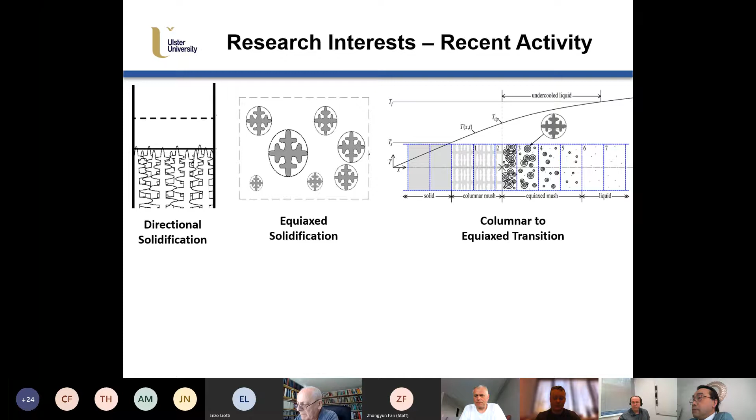I have an interest in equiaxed solidification, grain refinement and so forth, which I'll talk about in more detail today. Then the columnar to equiaxed transition, a very natural but non-trivial extension of the previous 2 domains. Recently, we have interests in additive manufacturing, modeling a moving point heat source, with research associate Dr. Sagar Nikam and PhD candidate Miss Anna Harley.

Also recently, liquid phase separation that happens in monotectic alloys, looking at what happens in the liquid as it separates out. Dr. Emma Kerr and Miss Courtney Gallagher, a PhD candidate, work in this area, in collaboration with Access eV in Germany.

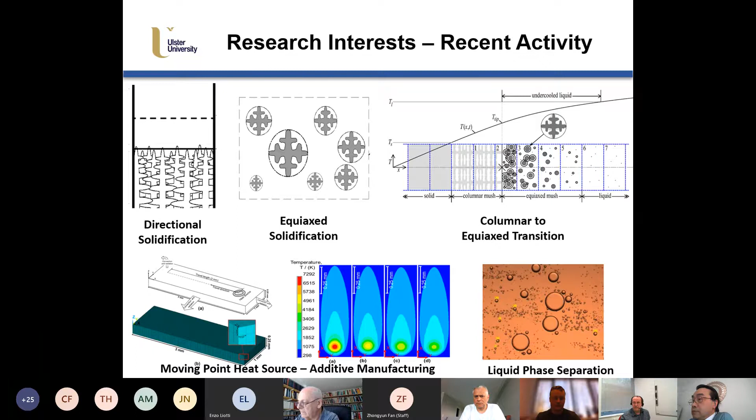Going into directional solidification, this is work in collaboration with Professor Anthony Robinson, a heat transfer specialist at Trinity College Dublin, and Mr. Turlough Hughes, a PhD candidate we co-supervise. This is a neopentyl glycol alloy, alloyed with camphor, 35% weight camphor. It's transparent, but it also undergoes dendrite orientation transitions. It's face-centered cubic, but changes morphology based on composition: at low compositions it's a classic 100, and above 30% it starts to exhibit 111 growth behavior. Turlough is on the line today.

I'm going to show you some of his work. You should see the apparatus here. We do solidification from the bottom up, and behind the dendrite tips it's quite translucent and very difficult to pick up detail. But at the dendrite tip itself, you can see some detail. With a very robust and novel algorithm, you're able to determine both the growth velocity and the orientation of the dendrite tips. There's a thermocouple within the sample, and it gives a reasonable estimate of the temperature at the tips as it reaches them. The best analogy is that we're no longer identifying select dendrites as representative of the growth, but analyzing the entire forest of dendrites.

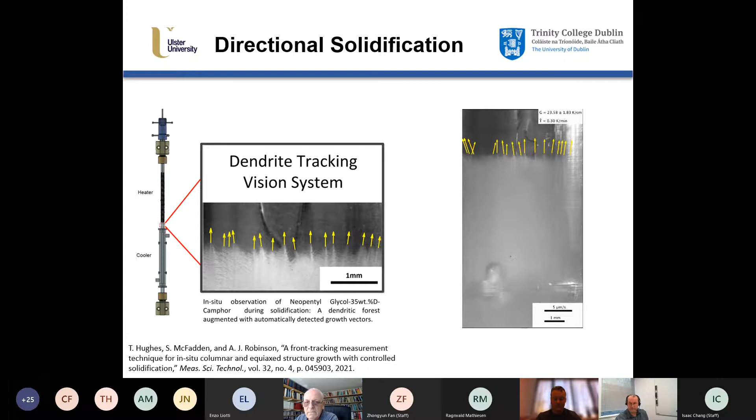And also looking at another automatic system that tracks the front, but then it crops a window around the front position, and then it concatenates the figures and builds up this true representation of the growth. And what you can see is a lot more detail. So you can see the orientation, the colonies of the grains, the grain boundaries, and you can see primary and secondary dendrite arms.

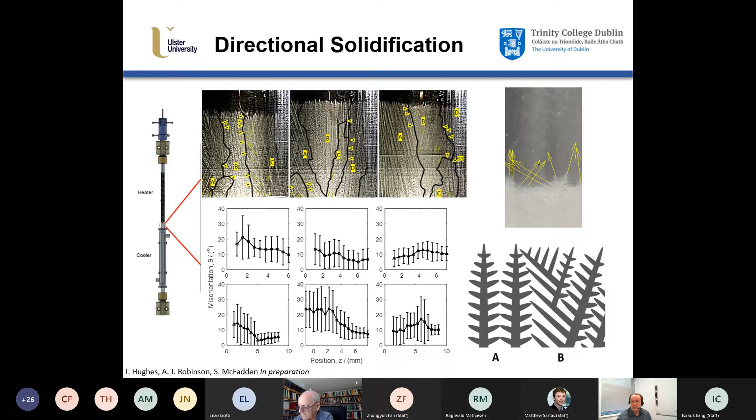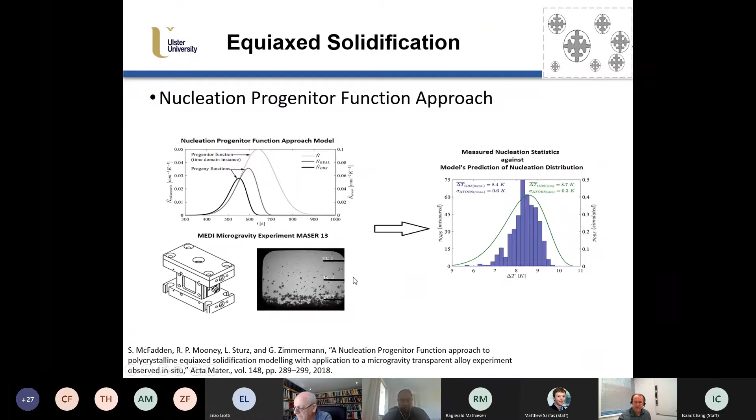Moving on then to equiaxed solidification. We've developed this method called the Nucleation Progenitor Function approach. And I just say that this was published in 2018. And we based this on the MEDI experiment. And I'm going to go into much more detail in this, so I'm just going to move quickly on from this one.

Moving on to columnar to equiaxed transitions. So there's a series of experiments done throughout the CETSOL project. Experimental data was gathered from the International Space Station, where they did Bridgman type solidification. And under different kinds of transient conditions, they were able to get different types of CET. And with a velocity jump, you get a very sharp CET. So you see this columnar solidification and then transitioning very abruptly into equiaxed.

And then when you do gradient decrease, you see that it is best described as being majority columnar to begin with, and then majority equiaxed at the end. And even at the end, you'll see very clear evidence of elongated columnar grains within the structure. They become less prominent at the end, but this is what we call a progressive CET. So it's not a sharp CET.

So how to capture this? Well, we used the Nucleation Progenitor Function approach for equiaxed, and we used front tracking for the columnar. And we did a fairly fundamental thing. We said, well, why don't we just completely disband with any mechanical blocking criterion? There's a very famous mechanical blocking criterion by Professor Hunt, and we said we would just try and model this using Kolmogorov principles, which were the principles of the Avrami equation.

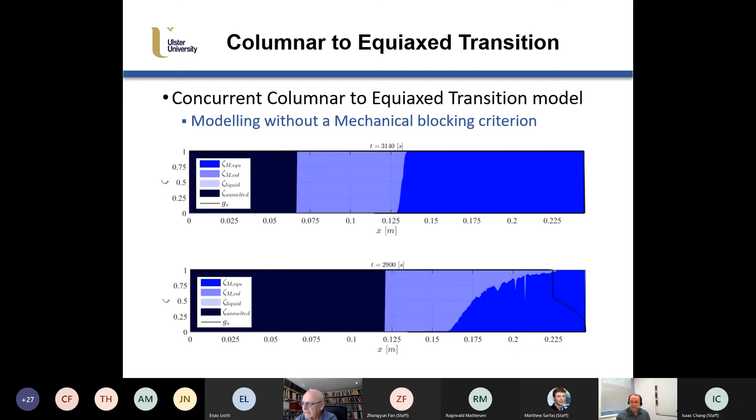And you see the solid fraction in the black line. But then in the case beneath, you see a very progressive transition from the equiaxed as it overtakes the columnar solidification. So this is kind of the behavior qualitatively that we were looking for in the modeling.

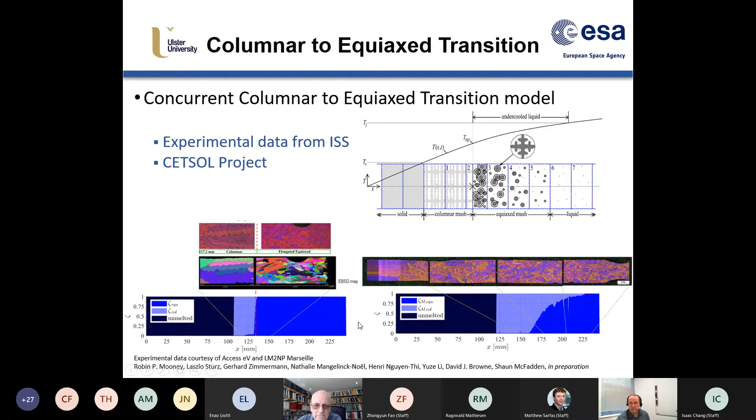And then when we compared that, and if you look at the extents and try to map against the different positions, I think the agreement is reasonably good. There were 4 experiments done in total, and we were able to then take the information from the simulation. So this is the information, the tip growth rate and the temperature gradient at the solidification front, and able to map this onto a Hunt diagram.

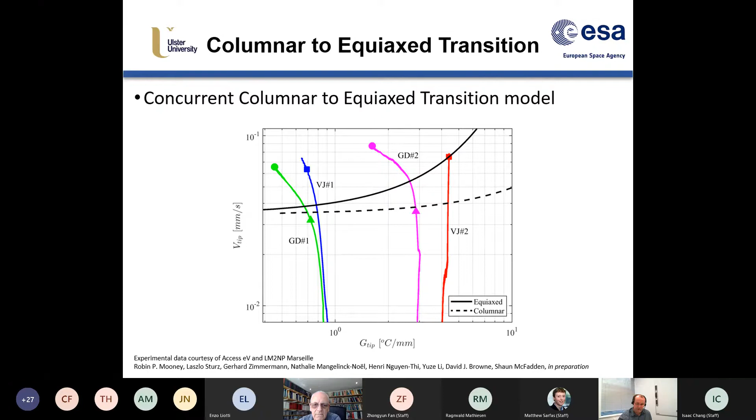And what we found was that it was very hard to get a single set of nucleation parameters for the Hunt diagram that would satisfy all 4 cases. It was practically very difficult, I would say impossible to do. What we were able to do, though, with the simulations, all 4 cases, we were able to simulate faithfully the CET transitions in all 4 using a consistent set of parameters, using the combined concurrent columnar to equiaxed transition model.

Very briefly then, moving point heat sources. So modeling in ANSYS and Fluent, we are looking at what's the effect of Marangoni convection on the moving point heat source. So there's a temperature gradient across the top of the surface of the melt pool in additive manufacturing, and then this causes a surface tension gradient, and that sets up a Marangoni convection. The effect of that Marangoni convection is to reduce the overall peak temperature. It sort of broadens out the melt pool and it makes it more shallow.

So a simplified way of doing that is to artificially increase the thermal conductivity in the liquid if you're modeling with conduction only. That will have the same effects. And so that's done quite a lot in literature, but there's not really much agreement as to what correction factor you should use. So what we did here was we modeled in Fluent with Marangoni convection, and then we modeled in ANSYS using APDL with the conduction code.

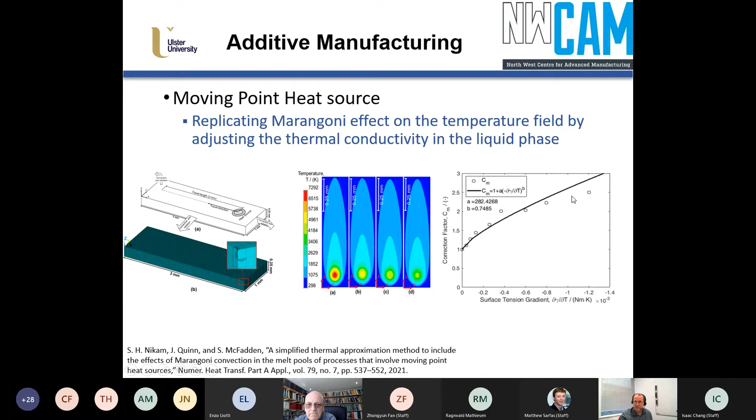And we modified the surface tension gradient in this Fluent model, and we modified the correction factor for thermal conductivity in liquid in the APDL conduction model. And we got this relationship, so that's out there now for people to use if they find it useful. Okay, so back to our outline.

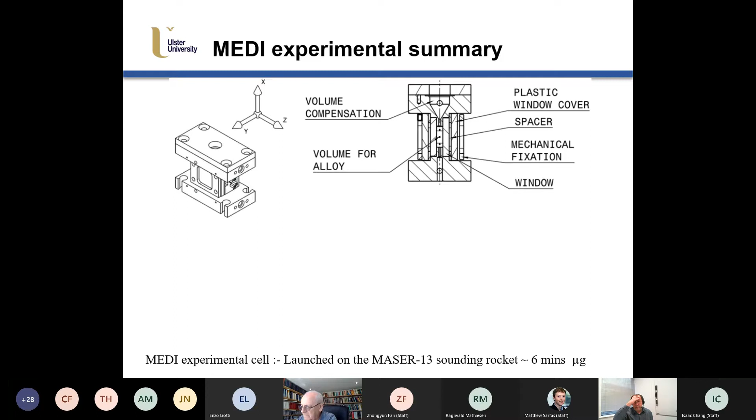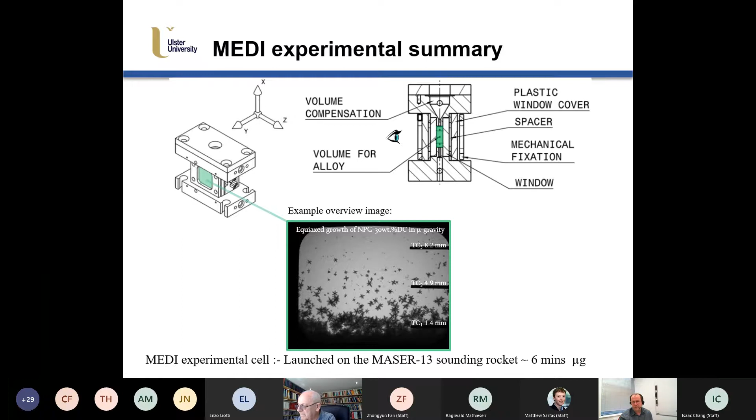So a very important point to move on here is to express this nucleation progenitor function approach. So the MEDI experiment was flown on the Maser 13 sounding rocket, and it achieved around 6 minutes of microgravity. So within this assembly, you have a little pocket here of the sample, and it's heated top and bottom. It has 3 thermocouples inside, and you were able to observe this window, and it's backlit, so you can see through all of the equiaxed crystals. One of the nice things about neopentyl glycol-d-camphor alloy is that it's quite a good equiaxed former. And so at low temperature gradients, it was able to form equiaxed.

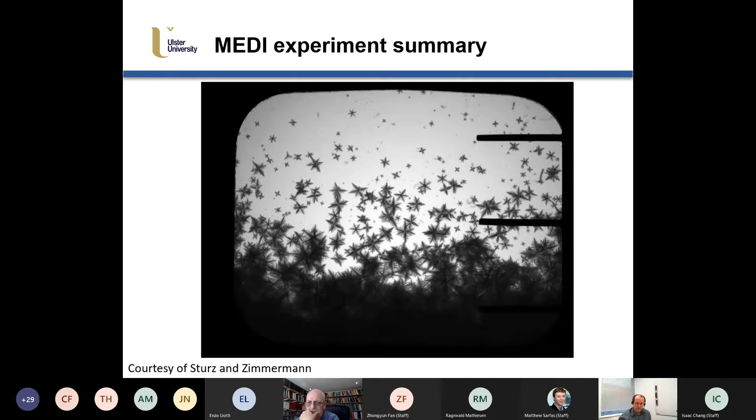And hopefully you can see a video of the microgravity video data that was obtained. And you see there's a slight temperature gradient, so it's slightly cooler at the bottom and slightly hotter at the top. And then you see the solidification coming up. And that was as much as they were able to do in microgravity. But it's a lot, and there's some good information there.

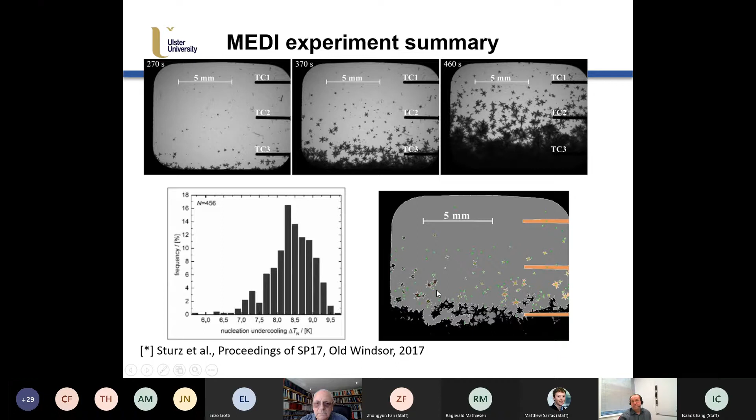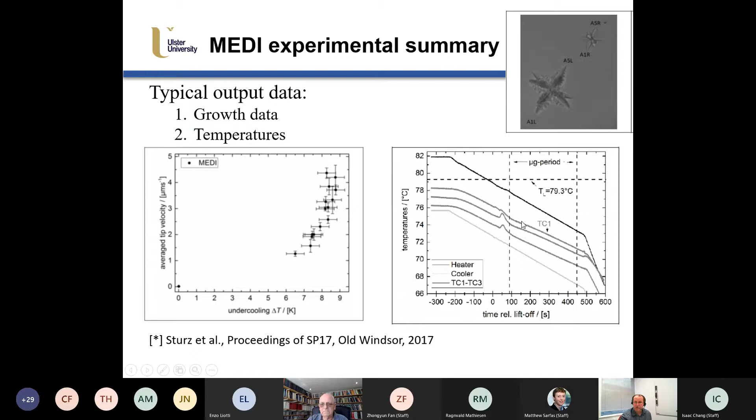They were able to get the frequency of the nucleation events. They were also able to do some thresholding here of the images to get the area fraction. And so all of this data was out there. They also had a nice optics system where they were able to zoom in and magnify individual crystals, and they were able to get some average tip velocity versus undercooling. So again, growing at around 6 to 8 Kelvin of undercooling. And because the thermocouples were inserted within the sample, they also have pretty good temperature data inside as well.

So one of the issues that we came across with this experiment, the sample itself is around 3 millimeters thick in depth. So the crystals are much smaller than 3 millimeters. So that causes what we call a stereology problem. So it was backlit, and it's observed from the front. And this is a solid model that I developed here, and you can see that individually, none of these particles are impinging with each other. They're all isolated, separate, individual particles.

But when you project them onto the front, you get this problem of overprojection. So some of them seem to be overlapping, but they're not. And some of them will be unobservable because they're either obstructed from view or in the shadow of a bigger crystal. So you don't really get a true representation on the plane. You get an areal representation of what happens in 3D.

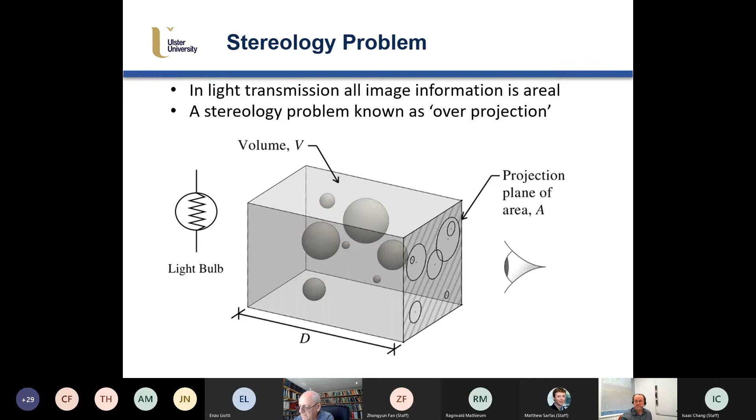So trying to get to the bottom of this and trying to tackle this problem, we returned back to the Kolmogorov definitions of the Avrami equation, one of the most famous equations in transformation kinetics. If you go back to Kolmogorov, he was a statistician, and he did a lot of statistical analysis and introduced this concept of real and phantom nucleation.

And so we revisited, and what we looked at is you have this nucleation activation rate, first of all. So all of your seed particles are passive, and then they become active. So this would be like initiation, let's say. But how many of these are actually real, and how many are, to quote a phrase, phantom? So what does phantom mean?

Phantom means how many of these, if they had nucleated, would have nucleated in a previously transformed region. So they never nucleated. But from a mathematical perspective, Kolmogorov insisted that you should really model the phantom nucleation as well, and then you can develop a much more consistent mathematical model. So you have real nucleation. These are the ones that we're trying to capture that really nucleate in 3D.

But extending that principle again to 2D, we can look at Kolmogorov principles here. So we can get the real nucleation events, and we can calculate how many of those are observable based on area fraction and volume fraction and the depth of the sample. Or we could just go directly from the activation rate and calculate the number of observations based on this. So it gives you the same results, whichever way you do it. That's the one feature.

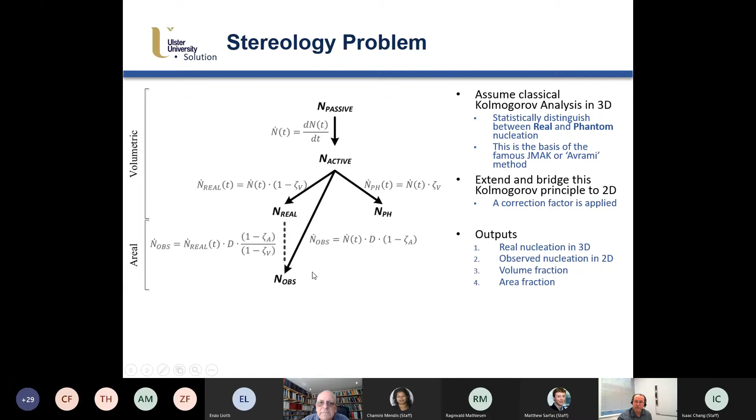Okay, so let's go. And so the idea here is that there is a way of calculating the number observed in the 2D plane. And so the outputs here are real nucleation in 3D and observed nucleation in 2D. You get volume fraction and area fraction. And with all of this information, you can construct the complete picture.

So we compared this then to some of the classical stereology. Underwood had some correction factors, and if you break it down, you can show that they're equivalent. It is equivalent.

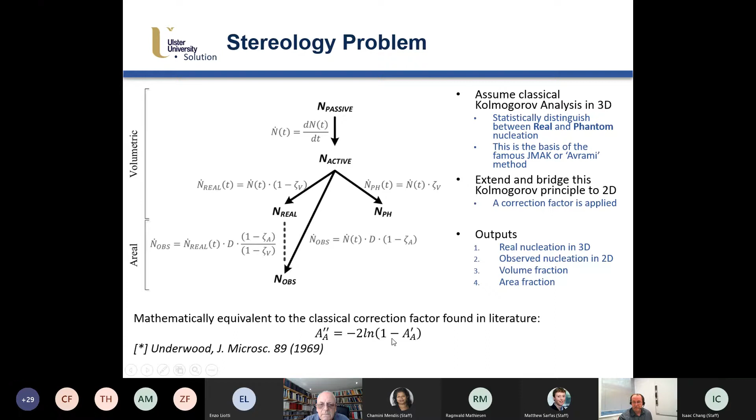So what is the nucleation progenitor function approach? It's new terminology that we've introduced, and what we're trying to do is look at it in a different way that will be more instructive. And in particular, we're aiming to define progenitor-progeny relationships within the theory of microstructural kinetics.

What's a progenitor? A progenitor is a function that describes where all seeds come from, or how all seeds are arranged in the domain. They're assumed to be distributed uniformly following a Poisson distribution, and then you can have any athermal distribution in undercooling. Here we show the one by Oldfield from 1966, which is a normal distribution. You can have a log normal distribution, and that might be closer to the work of Professor Greer and co-workers.

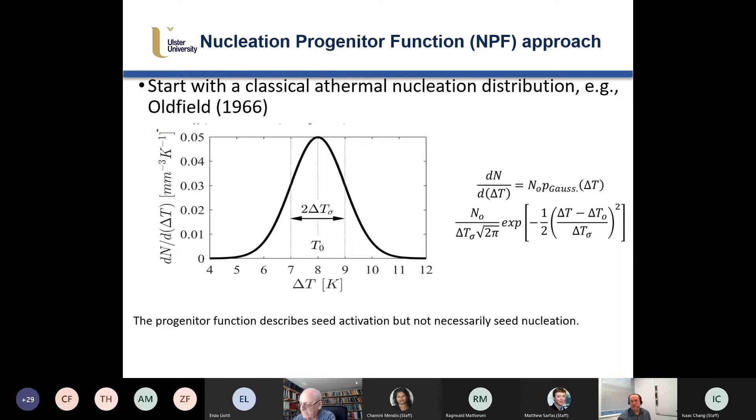You could have exponential. You could have a Dirac function, and that would be able to model explosive nucleation. But all of these are like plug and play. So you need a description of athermal nucleation, and we call this the progenitor function. The progenitor function describes seed activation, but not necessarily seed nucleation, or initiation, as we may call it.

So one of the benefits we found of looking at this NPF approach and the Kolmogorov methods is that there's a host of statistical tools available that give really good information if you look at it in this way. So the first thing we do is apply a coordinate transformation. If you have the time temperature curves, you can go from undercooling to a time-based coordinate transformation. That's very easy to do.

You can do that either through modeling, or I suppose you could do it experimentally as well if you had the cooling curves. But then we apply exactly the approach that I've just described to you. And we look at this here as the progenitor. And then down below, these sort of children are the progeny of the progenitor.

So here's the progenitor that applies across all. It's a full description of the nucleation characteristic, and the progeny functions that come out of this then are shown here, and they're all derived off the progenitor. So here you have a real progeny. The real progeny is what really nucleates, and the difference between the progeny and the progenitor is phantom nucleation. You also have a progeny for the 2D observation on the 2D plane, and because it's separate units, we have it here on the right hand side, so it looks slightly different, but this is also derived from the progenitor.

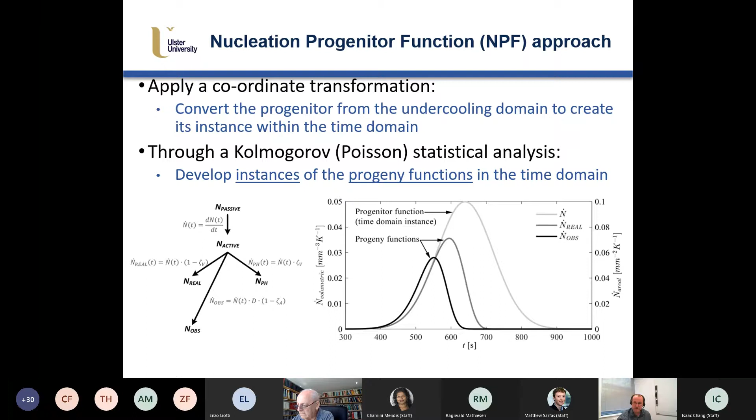There's one progenitor that applies across the entire domain as a description of the grain refiner. But every single nodal point in this simulation and in the domain will have its own progeny that develops over time. So there's a lot of information available from all of these progeny that all come from one progenitor. And what you're able to do then is obviously you can integrate to get nucleation density, nucleation counts. And you can also then compare the activation rate to the real rate, and you can get the nucleation efficiency.

Continuing on with these statistical tools, you can reverse the coordinate transformation at any point. So you can go back into the undercooling domain, and you can normalize, which is another statistical process, and you can apply the expected value theorem. And through the application of this, you are able to determine mean undercooling, the standard deviation of the undercooling, the real undercooling. And indeed, if you wanted to, you could go higher order statistics. You could also calculate skewness, kurtosis, up to that level.

So what are the advantages of NPF? So if we're doing anything, we want to add value to it. So why are we doing it this way? We're doing it this way because of these particular advantages. We can easily include the stereology correction. That was the initial motivation for doing it. But what we found was through this normalization process and using application of expected value theorems, at any point you're able to develop formative outputs or running statistics or summative outputs at the end of the simulation.

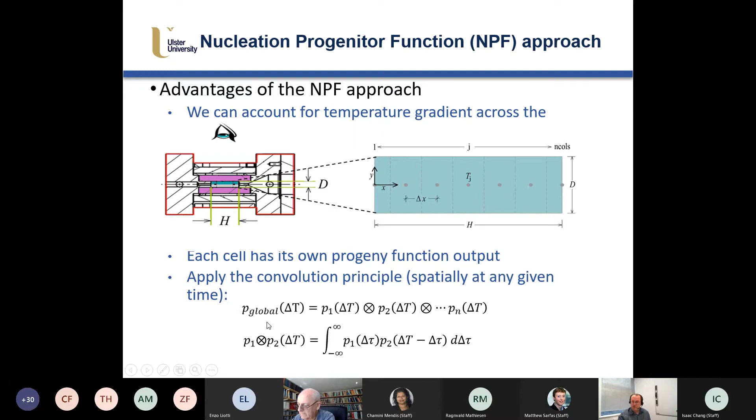As I explained, there are progeny functions at every nodal point. So how do you summate all of these? Well, if you use the principle of convolution, you can add all of these progeny together, and then you get an entire global representation of the nucleation across the entire domain, or any domain of interest, really. So we did here the entire domain, and we're able to get a global output for nucleation across the entire undercooling domain.

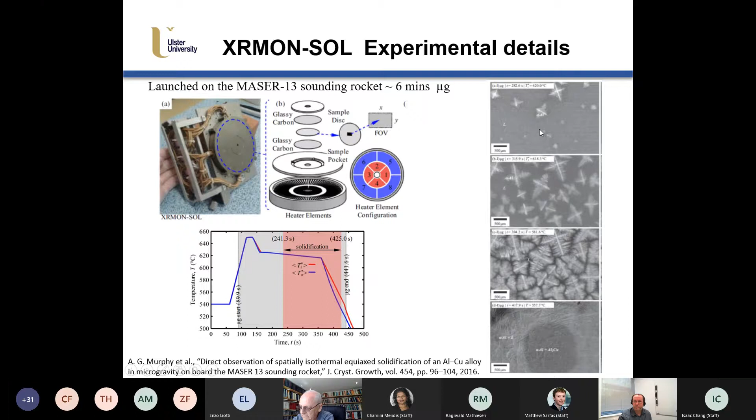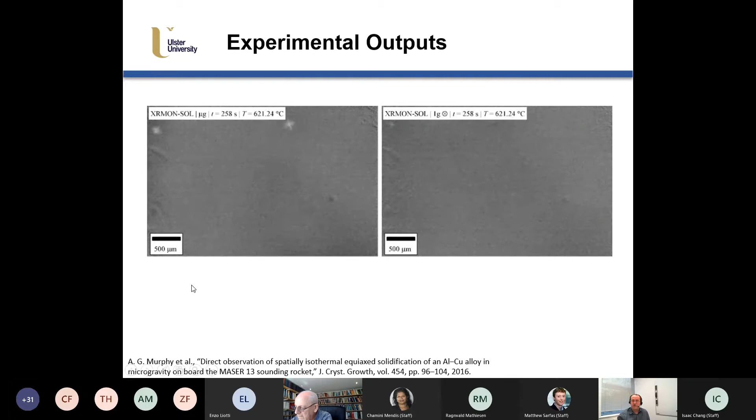And I'm going to show you here, there was some equiaxed solidification observed. So hopefully you can see this. The left-hand side is the microgravity. The right-hand side is a repeat experiment on ground. And you can see the equiaxed solidification. And finally, if you look closely, you can see the eutectic transformation occurring as well at the very final stage. So you see that it's quite slow, and then it goes through a rapid cooling phase, and then it goes eutectic like that. Okay.

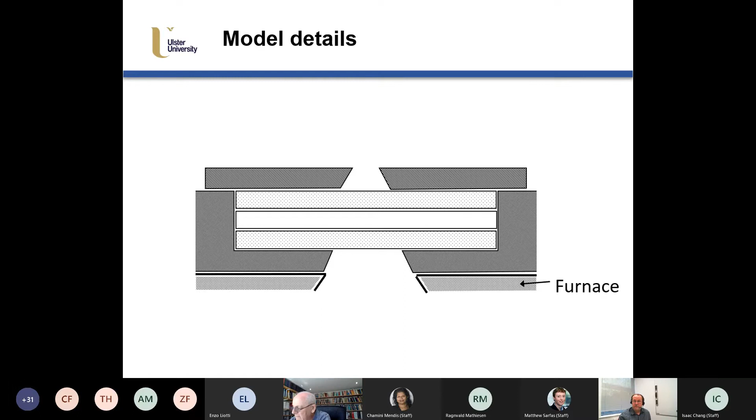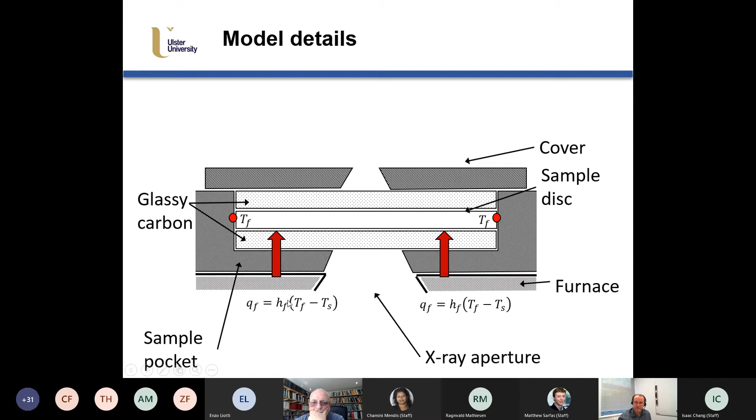So the model details, then we had to replicate this furnace, and so you have your sample pocket, you have glassy carbon, you have your sample, you have a cover, and then you have this X-ray aperture in the middle, which is conical to account for the diverging X-ray beam that's going through. We applied the temperature at the boundaries, but we also have more heat input from the outside. So this is from the furnace. This heat transfer coefficient for the furnace is really an important tuning parameter.

You have heat loss from the top. So we estimated what the heat transfer loss would be from the top. And then in the center, you have what I would say is like a cold finger, where you have both convective and radiative heat losses through the sample, through the X-ray aperture. So this does cause a cold finger effect.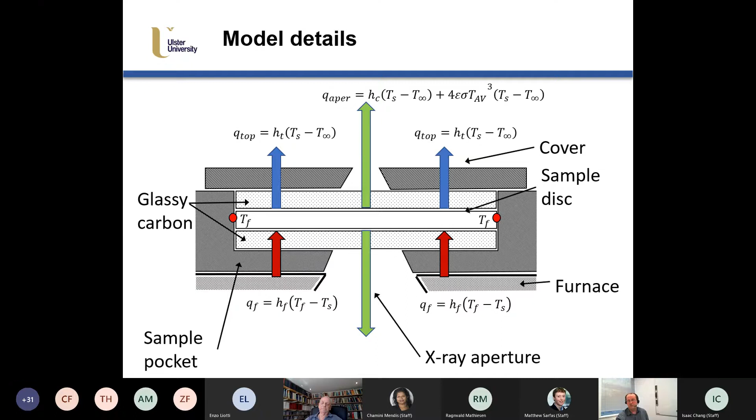Just some of the model details. So it's a continuum model. The biggest difference here is that we had to move away from spherical growth, so spherical representative element volumes, to disc-like geometry to account for the thin samples. Now, there's no stereology issue with this because it's a thin sample. So the stereology problems and transmission all go away because of the very, very thin sample. So that was one aspect that was simpler for us in this case.

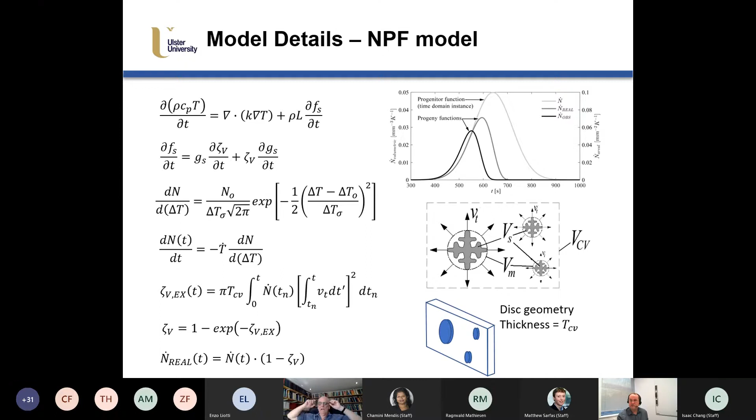Some other details here. We use a Rappaz-Thévoz model. It's essentially Scheil-Gulliver, to be honest, with an isothermal eutectic transformation. We're using the LGK growth law, and a new addition to the model here is we're trying to represent the average growth radius at any particular point. And we do this by a back calculation, and we'll show you some of those results today.

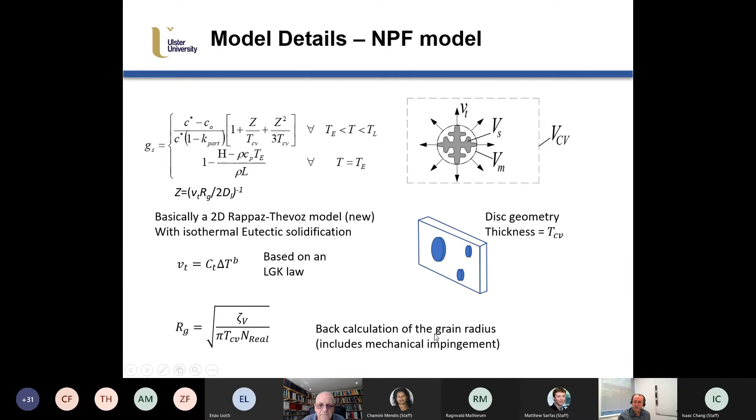A very interesting point that we discovered is the recalescence, and the model wasn't working very well until we actually made a deeper investigation into the recalescence. Essentially, the model was originally set up to be fully reversible, following both the nucleation and the Scheil curves faithfully, both on heating and cooling. But what we found worked best was that when you cool down and reach a saddle point, it starts to reheat because of the latent heat, and the growth continues. It's still undercooled, so the growth is still continuing, but we had to switch off the nucleation.

So the idea is that the nucleation, under recalescence, would have to go to 0, and would only reinitiate again when it would reach this point here at the end of stage 2, which is at the same point. Also, more importantly, we had to maintain the solid fraction during the recalescence phase. So we assumed no remelting or no thinning inside the envelopes.

Now, the solidification does proceed. If we look at the breakdown here of the solid fraction, one of these is a thickening term and one is a growth term. The growth term continues regardless of whether there's recalescence or not. It just goes at different rates depending on the undercooling. But the thickening term, we had to prevent it from becoming a thinning term.

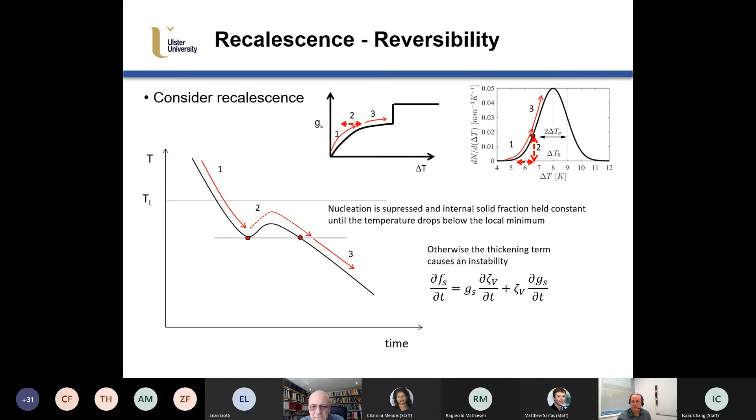The upshot of this is that if we didn't do this, then the model would become oscillatory and unstable. And so this was something we pondered and something we looked at, and we think it's quite physical and quite realistic, and it would be worthy of further investigation, especially this point on the thinning of equiaxed within the envelope under recalescence. But we think this worked well.

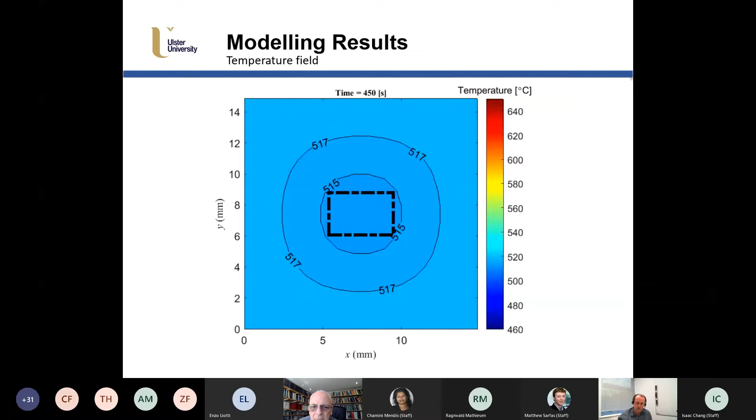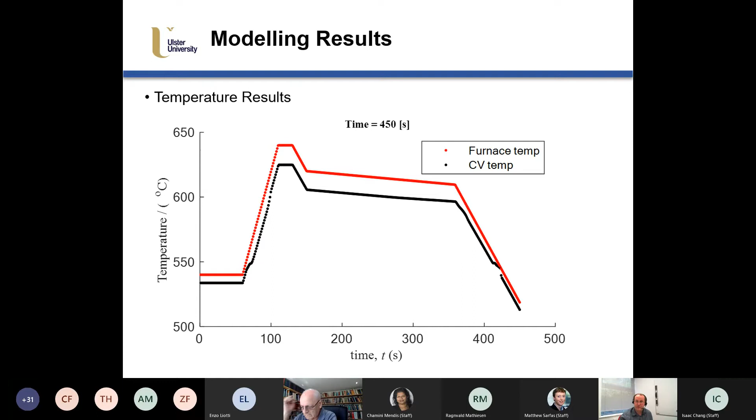Also, one of the advantages here is we're able to estimate the difference in the temperature of the control volumes to the furnace, which is something that wasn't available in the experimentation. You only have furnace temperature in the experiment. So here we see potential added value.

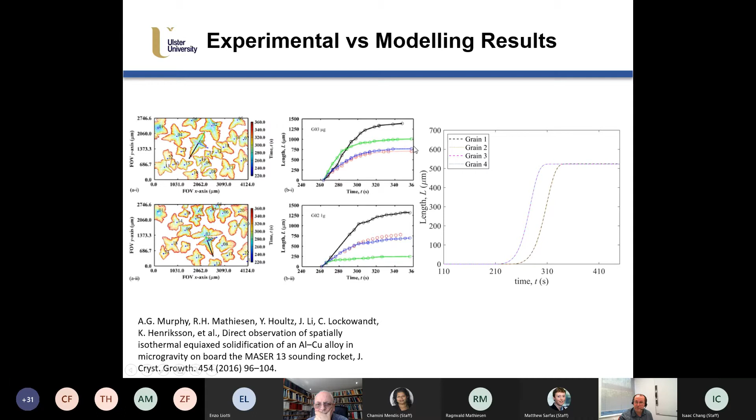And also then looking at the length of the arms, so this is in micrometers. So again, looking in 4 directions and looking at the 4 lengths and getting an average, you would then be able to compare the average to what was predicted by the model. And here's what was predicted by the model. So qualitatively reasonable agreement, and we were getting around 500 microns for the final arm lengths, and that's not so far off from the average if you were to look at the average on these 2 cases as well.

You have all of the grains. There were 22 crystals observed in this field of view, and you have the locations, you have the timestamp, and you have the furnace temperature, not the sample temperature, but the furnace temperature. Just to give you an idea, the liquidus temperature for this alloy, aluminium 20% copper, is around 603 degrees Celsius.

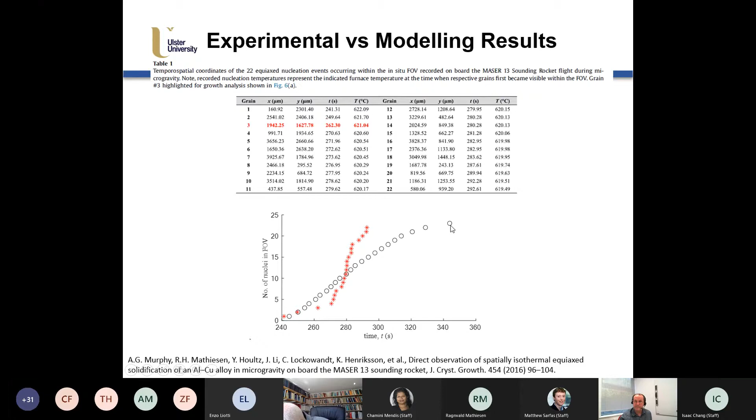So, in conclusion, the NPF approach has been applied to metal alloy solidification. That was the initial premise of this application. So the approach is feasible. Why do anything? You have to show advantage. So the advantages of the NPF approach: observing this through the progenitor-progeny lens is a new way of looking at it that we're proposing. The microstructure kinetics are fully integrated into the thermal model. Indeed, the microstructure nucleation and growth rates drive the latent heat.

Athermal nucleation models are plug and play. So we can put any athermal description, whether it's a Greer log normal, or a delta Dirac, which would model explosive nucleation. We could use any kind really, and analyze it in different modes. I say here, maybe a little bit glibly, but I think there's a wealth of statistical information available as either running or final statistics. And that's something that we got from this progenitor-progeny approach.

Stereology effects are easily accounted for when the sample is bulky, so that was a problem with the MEDI experiment, and we were able to overcome that problem. It's not really a problem for the thin film samples, the X-ray samples. But consider this: if you're doing this post-mortem, a traditional polishing and etching of a sample, you have a different kind of stereology problem, a sectioning stereology problem. Your volume fraction and area fraction will be similar, but the average grain sizes will be smaller because you've taken a cut through. That's assuming it's equiaxed, of course.

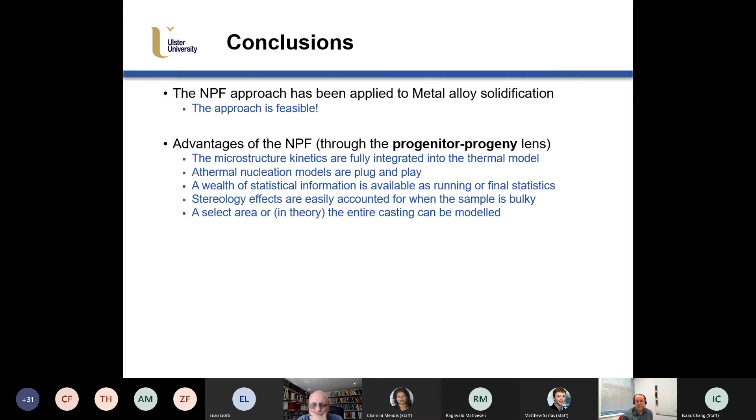So what we demonstrate here is that you can get this progeny function at a particular point. You can look at a select area within the field of view, or you could, in theory, model the entire casting using this approach. So this method can be scaled up to any casting to give global information. Temperature gradients: a nice benefit of the convolution principles and pooling all this information together is that low temperature gradients don't really present a problem. As long as the growth is equiaxed and low gradient, we're able to model that by combining all those statistics. Grain refiner performance can be estimated, so we can look at grain refiner efficiency.

It has already been extended to the CET. The nucleation progenitor function approach that I've presented today was also the basis of the equiaxed in the CET modeling that I showed you at the very start. So it does go into the high temperature gradient, where you would have columnar growth as opposed to equiaxed growth. And more importantly, we've been able to model not just different phases, but different morphologies of phases, which I think is a nice addition to any modeling previously done.

Future work. Solute rejection effects can be added, and I have very firm ideas how this can be done, and I think that would form the basis of a very nice piece of work going forward. It would be nice to add in more phases. In this project, we looked at the primary alpha phase and the eutectic. If there was interest in other phases like intermetallic phases, that could also be worked into the model. We also have the CET model, which looks at morphology of phases. So there's a lot there to look at.

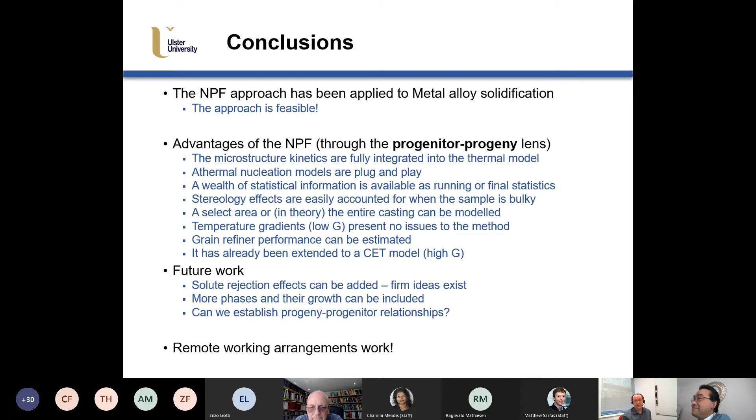And I think one thing the pandemic, as terrible as it has been, has taught us is that you can work remotely now. The world is a smaller place. So I may be separated by land and sea, but I'm still very much connected and able to work on this type of work in particular.